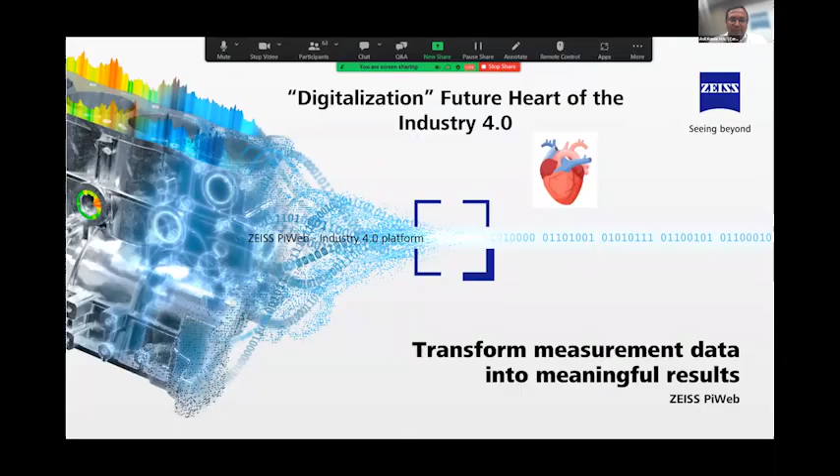Today the topic we want to showcase here is digitalization, the future heart of Industry 4.0. As we know, the definition of digitalization is the use of digital technologies which help us change a business model and provide new revenue and value-producing opportunities. It is a process where we move from analog to digital businesses. The purpose is to enable automation, increase data quality, collect and structure all the data, so that we can apply advanced technology which will help us have better and smarter software.

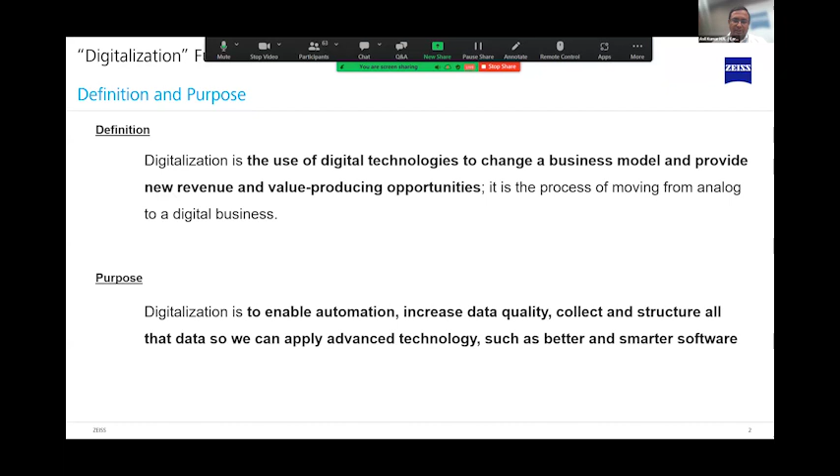I'll just run a small video which will tell us how the software works.

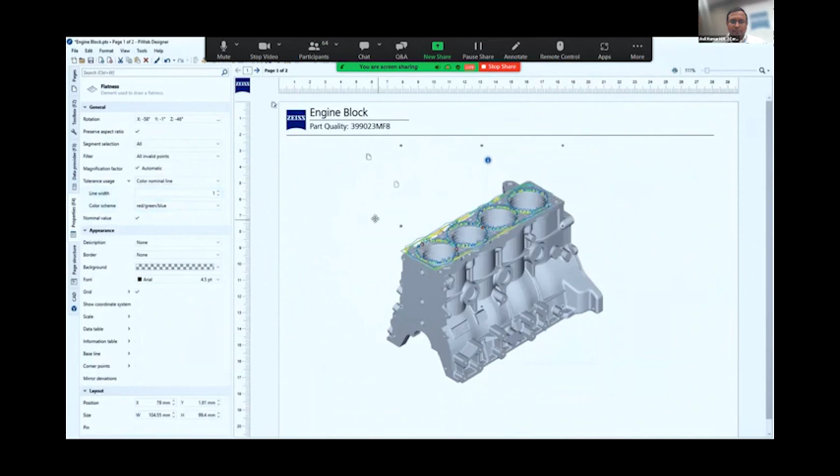Thank you. As was told by Mr. Ramesh sir, we need to have the right decision and the right data. So the Zeiss PiWeb software helps with this.

We have seen a lot of transformation in digitalization, whether in how we transfer amounts and buy products, or in our industrial scenarios—how we started using verniers for measurements, how we presently work with instruments, and how log books have been converted into smart displays at the shop floors.

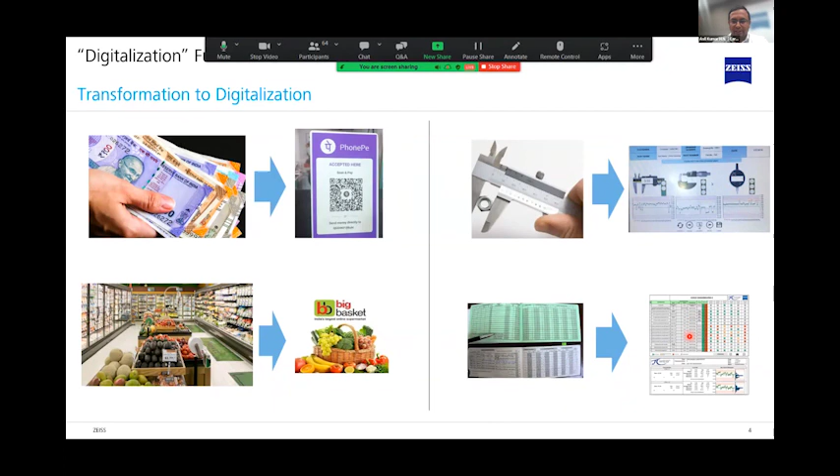This slide has been introduced much more by our panelists Mr. Saju and Mr. Ramesh. To have a transformation in digitalization, earlier we had standalone metrology solutions, and then semi-automated systems.

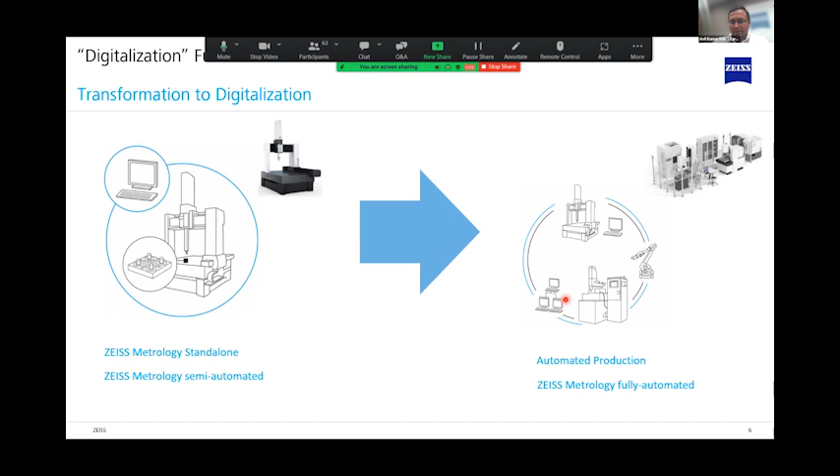Coming to digitalization, we have seen a lot of integrations from robots, machines, CMMs, and EDMs, into the software. One of the physical lines that Zeiss has introduced shows the integration of CMMs with all the manufacturing machines. This is an integrated cell where a lot of digitalization has been put across.

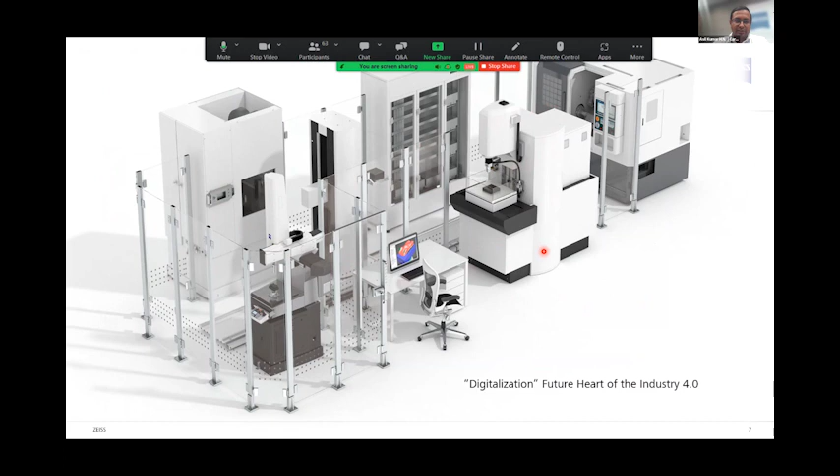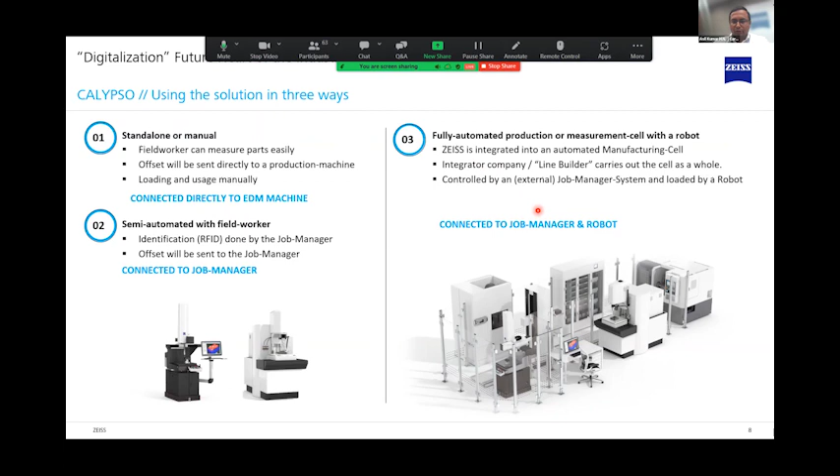As discussed, the standalone or manual setup is like one machine not connected to others. Semi-automated is one where there is manual involvement with some connection. And there are fully automated production cells controlled by a job manager, with a loading system by robots connecting the measuring machines and manufacturing machines.

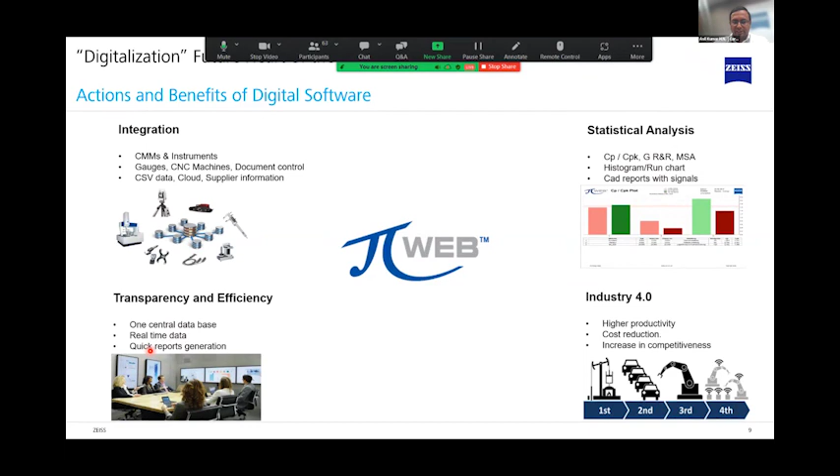The software where we collect most of the data is called PiWeb. The integration happens with manual gauges, CMMs, or instruments. It does all the statistical analysis, which helps us have transparency and efficiency, in line with Industry 4.0.

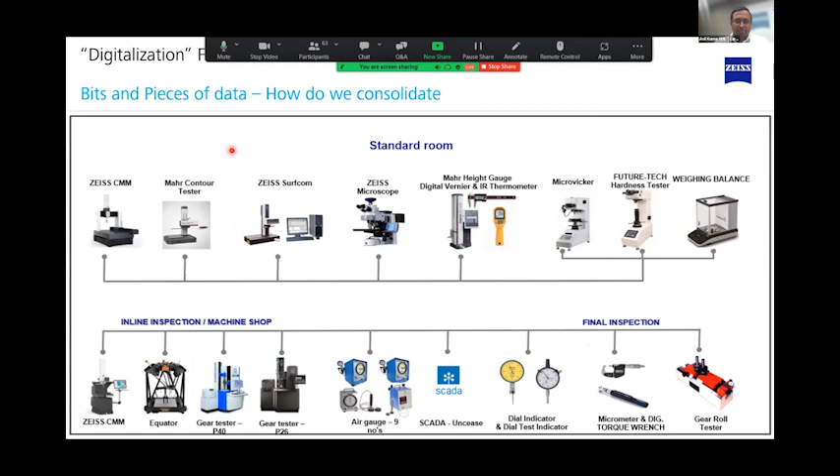Data is very important and helps with decision making. There are bits and pieces of information from all the feedback systems in a company. All this data can be captured at one location and showcased according to region, plant, or site.

If you see from the standard room inspections, the data gets pulled into a particular database, also from different suppliers, from management, and from inline sources. So all data can be pulled into one database which enables us to make decisions.

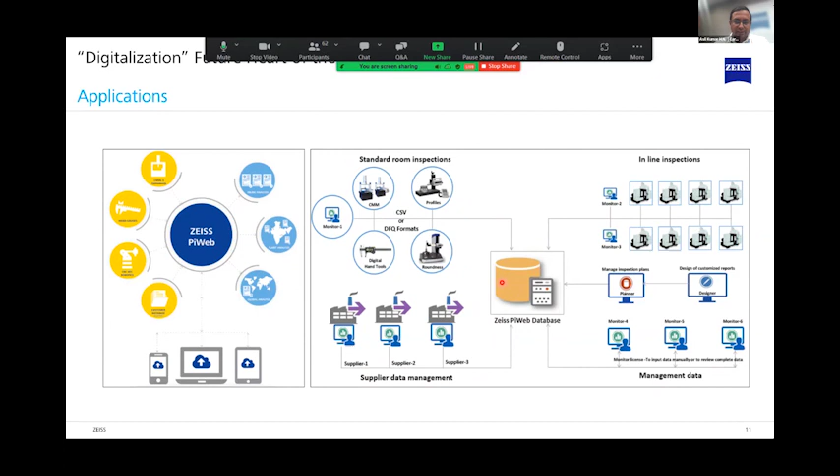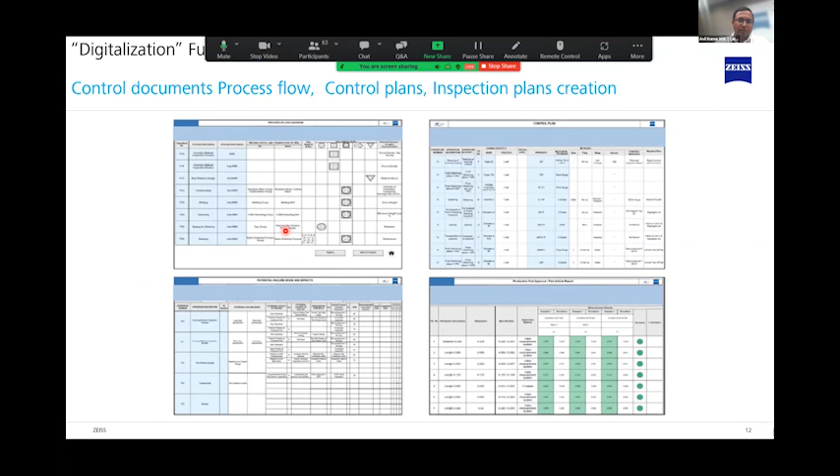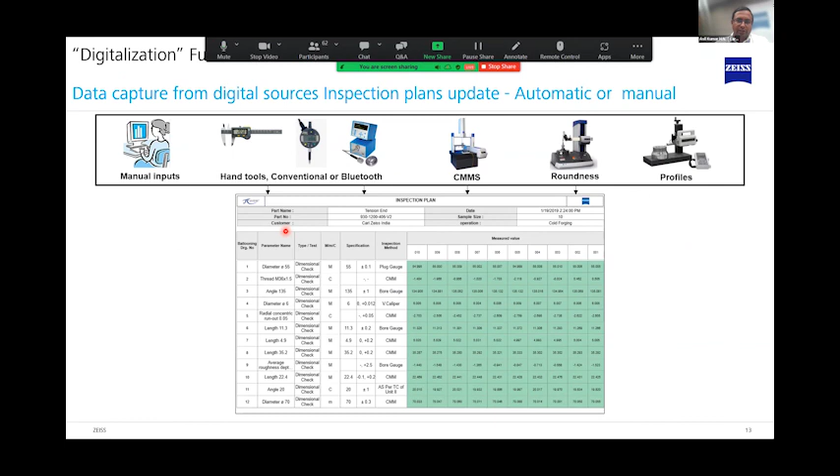These are a few documents that Zeiss PiWeb can produce: control plans, process flow, inspection plans can be created, and we can also work with automatic or manual gathering of information. This is important in Industry 4.0—charts like Cp, Cpk, X-bar R chart, histogram, inspection reports, and run charts.

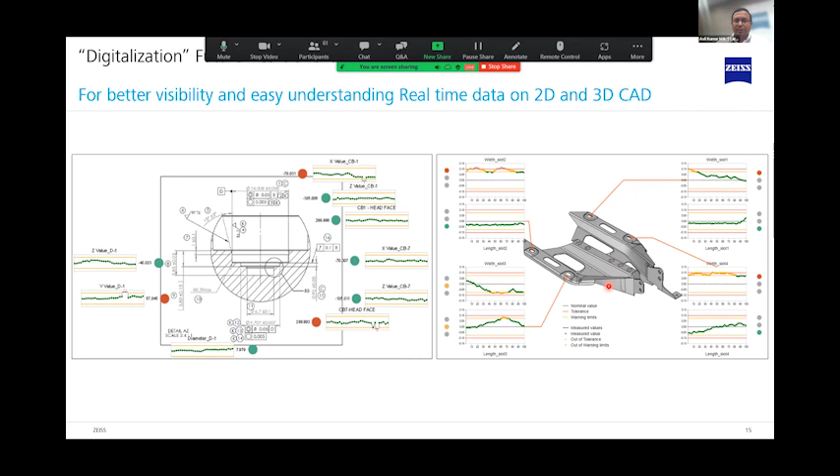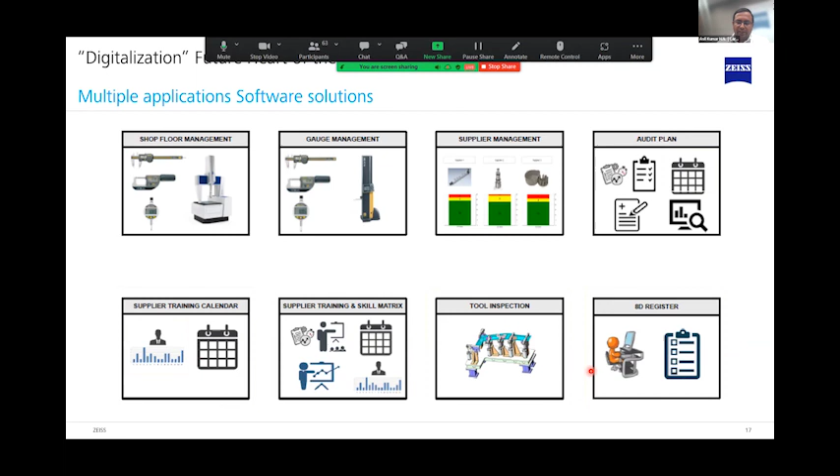In digitalization, we are strong in the powertrain industry, car body industries, mold industries, machining, and aerospace. These are a few customers for whom we have catered our digital solutions in India and in global markets. Thank you.